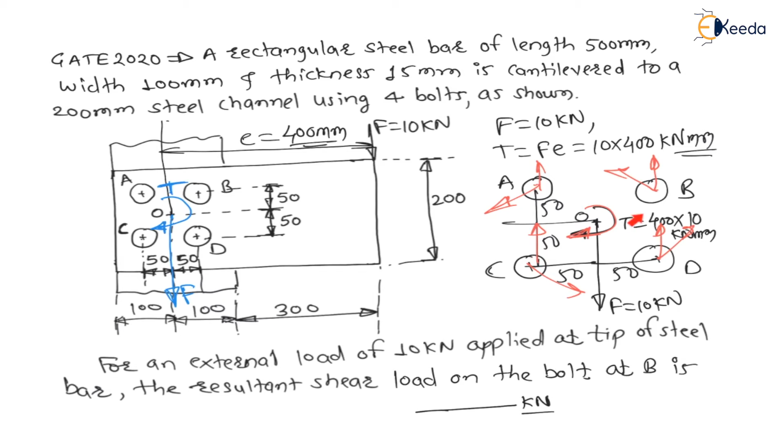Now everything I am erasing. We will consider these bolt dimensions and all the bolts that we are going to consider. Now consider the bolts. Here there is bolt A, bolt B, bolt C, and bolt D. Let us say these are the 4 bolts.

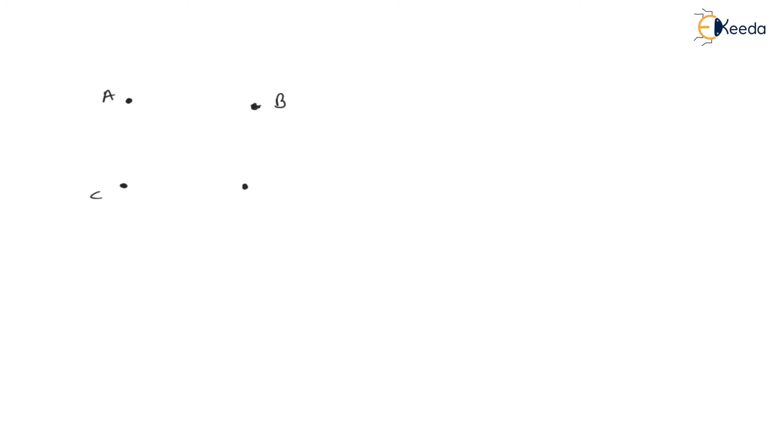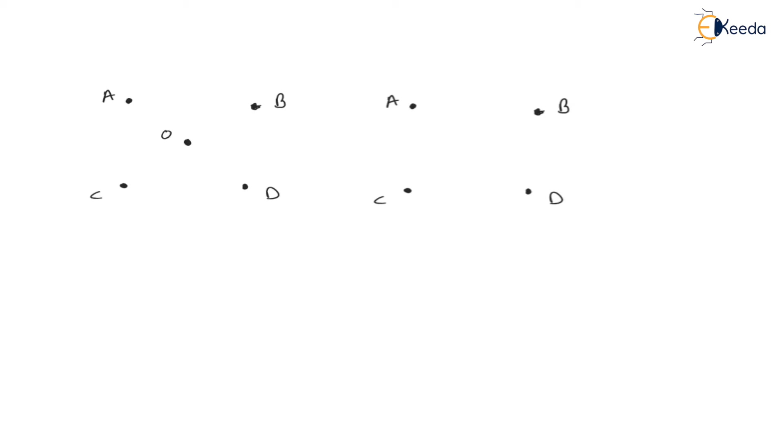Now on these 4 bolts, consider direct shear load separately and torque separately and add them together. Let us say this is the centroid of all the 4 bolts. Here O is the centroid of all the 4 bolts, and on this O, direct load of magnitude 10 kilonewton is acting.

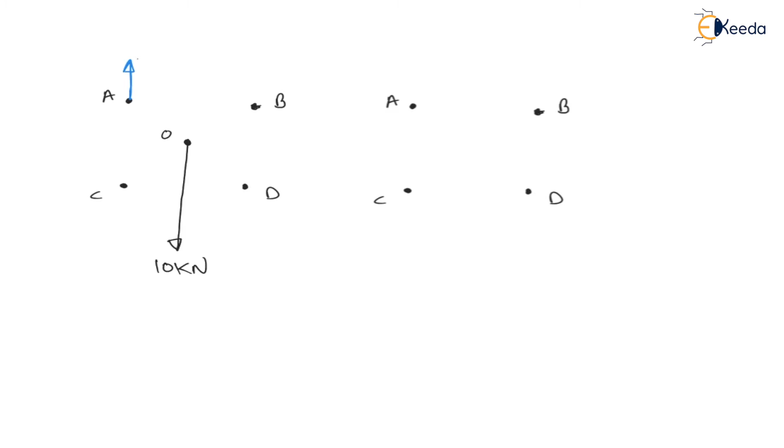Therefore, to resist this direct load, there will be a resistance in bolt A, primary shear load in A, that is PSA. There will be a primary shear load in bolt B, PSB. There will be a primary shear load in bolt D, PSD, and there will be primary shear load in bolt C, that is PSC.

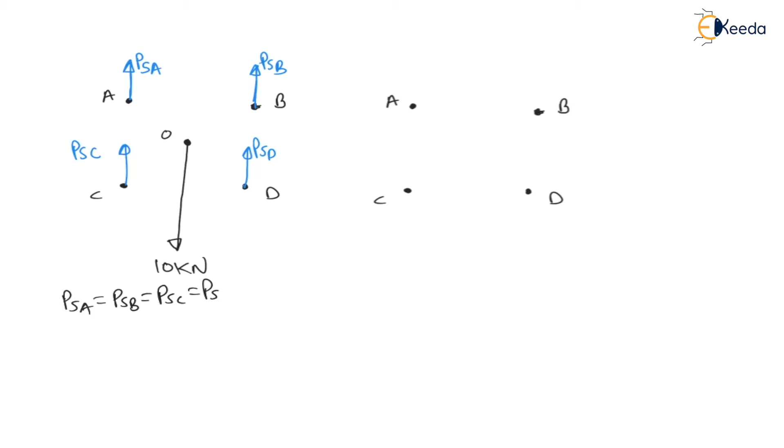To resist this 10 kilonewton direct shear load, there will be primary shear forces in all four bolts. Interestingly, the primary shear load is equally distributed among all the bolts. Therefore, PSA equals PSB equals PSC equals PSD, which is called primary shear load, which is nothing but total load divided by number of bolts, that is 4 bolts used here. Therefore, it is 10 divided by 4, so PSA equals PSB equals PSC equals PSD equals 2.5 kilonewton.

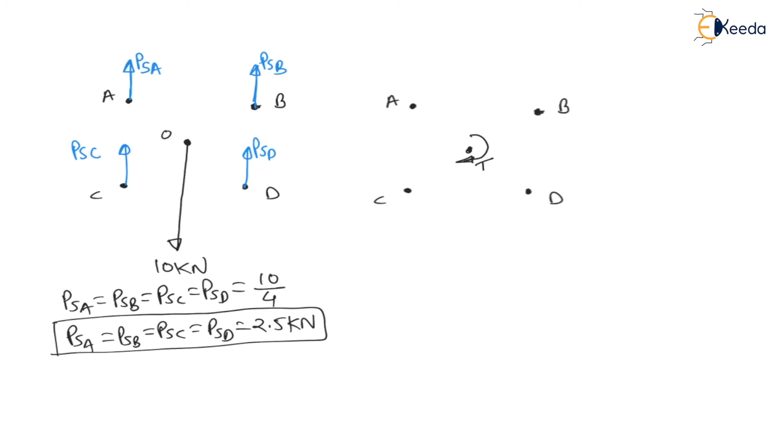It is in kilonewtons, my dear students. Now, if I consider torque separately, at this centroid, the torque is also acting. This torque T is of magnitude equal to force into eccentricity, which is nothing but 10 into 400 kilonewton mm, as we have seen.

Now, to resist this clockwise torque, there will be an anti-clockwise torque on all four bolts. So to create anti-clockwise torque, the forces will be like this. See, dimensions are given: this distance is 50 and this is 50, right? And heights are also given. These distances are given here, these distances are 50 and 50. In the diagram, this is already given.

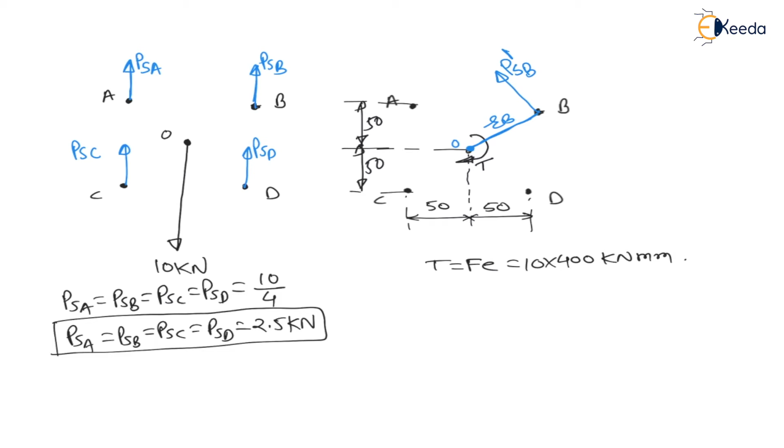Now, to resist this clockwise torque, there will be an anti-clockwise torque. For anti-clockwise torque, torque is nothing but force into perpendicular distance. Therefore, if I want to consider the secondary shear load on bolt B, then from O, the location of the torque, we take this radius. This will be radius of B, RB, and perpendicular to this radius there will be a secondary shear load which must create anti-clockwise torque. The secondary shear load on bolt B, PSB dash, will go like this, perpendicular to the radius. The angle between radius and force is 90 degrees.

Again, for bolt A, from O, the distance is called radius of A, and on A the force will go like this, the secondary shear load on A, PSA dash, which is creating anti-clockwise moment or torque. For bolt C, from O to C, this distance is radius of C, and the secondary shear load will be perpendicular to this radius, PSC dash. Similarly, for bolt D, there is radius of D, RD, from O to D, and perpendicular to this radius, in the anti-clockwise direction, there is PSD dash, secondary shear load on bolt D. Now, all the secondary shear loads are creating anti-clockwise torque to cancel the applied clockwise torque.

Now we have to find the radiuses first, then we will find all the secondary shear loads. From O, this distance is 50 and the vertical distance is also 50. Here 50 and this distance is 50. Now consider a triangle: this distance is 50, this distance is 50, and this distance is RB. Therefore this angle will be 45 degrees, this angle will be 45 degrees, and RB will be under root of 50 square plus 50 square, which is nothing but RB equal to 50 root 2 mm.

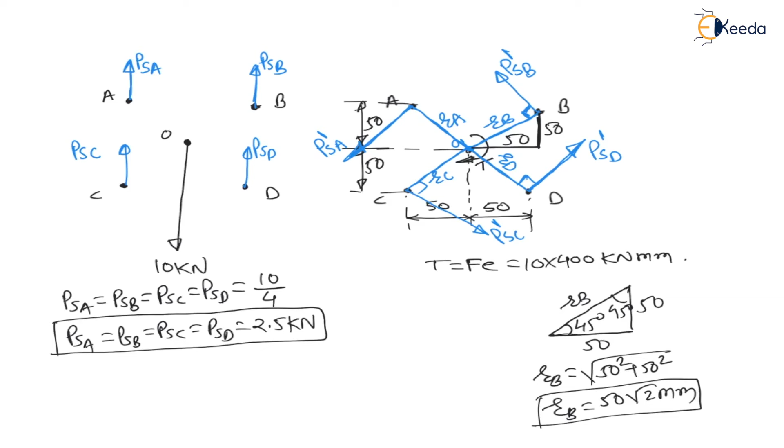RB will be equal to 50 root 2 mm. Similarly, due to symmetry, all the radiuses will be the same. That is, RA equals RB equals RC equals RD equals R equals 50 root 2 mm, because of symmetry you can solve in the same way for all bolts.

Now once you calculate the radiuses, let us solve for the secondary shear loads. The torque is 10 into 400 kilonewton mm. The secondary shear load is directly proportional to the radius, that is PSA dash is directly proportional to RA, radius of A, and this proportionality is removed with the help of a constant. Therefore PSA dash equals constant into radius of A, and this constant we have already proven with this formula, here I am directly using the result. This constant K is equal to torque divided by RA square plus RB square plus RC square plus RD square. This is the formula to find the constant, so let us find it.

Therefore K equals torque, which is 10 into 400 kilonewton mm, divided by all the dimensions in mm. Therefore we can say 4 into R square, that is 4 into 50 root 2 whole square. Therefore we get the constant value K equal to 0.2 kilonewton per mm, because torque we are using in kilonewton mm, and force we are using in kilonewton.

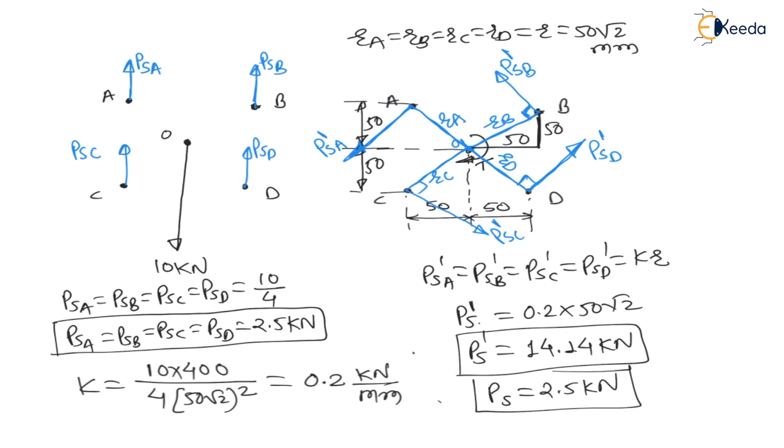Let us say here bolt A, bolt B, bolt C, and bolt D. Afterwards, we will give the names. Now here it is O point, centroid of all the bolts. On all the bolts, there is a primary shear, that is PS, of same magnitude, that's why I am writing PS only. There is a primary shear PS, and there is a secondary shear also, which is perpendicular to radiuses.

Here the radius will be like this. This is R. Here this distance is also R, and this distance is R, and this distance is R. These are the radiuses, and there will be secondary shear loads which are perpendicular to the radiuses, in the direction opposite to the rotation, opposite to torque, like this.

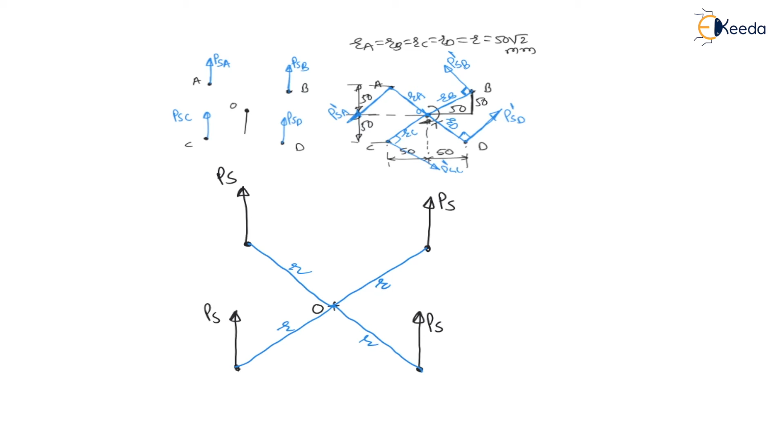This is PS dash, perpendicular to radius, PS dash perpendicular to radius, PS dash perpendicular to radius, PS dash. And bolts are, here there is bolt B, here bolt A, here bolt C, and here bolt D. These are the bolts.

Now let us combine them. The resultant of PS and PS dash will lie in between them. Now to join them, we need angles. Now let us find angles.

Let us find angles. See here, this distance is 50, this distance is 50, 50, 50. Because these two sides are same of 50, 50, this angle will be 45. Now extend this line. If I extend this line like this, therefore with horizontal this angle is 45, therefore with

vertical also this angle will be 45. But my dear students, our target is to find angle between PS and PS dash. This is your theta b, angle at b. Now can I say this radius and PS dash is perpendicular, therefore this theta b will be also 45 degree.

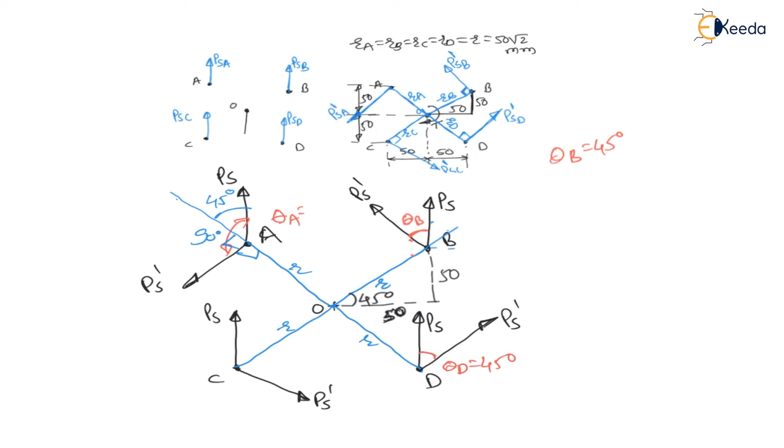Just we have calculated in this case vertical with inclined is 45 degree, and here these are perpendicular to each other. Perpendicular means this is 90 degree angle, means 90 plus 45 is 135 degree, therefore theta is 135 degree. Similarly, this theta c will be equal to 135 degree. Therefore resultant of these two, the resultant of all of them will lie in between.

That is resultant of b is like this, rb or fb, we can say pb, it is resultant load on bolt b. Similarly resultant load on bolt a, pa. Similarly resultant load on bolt c, pc. Similarly resultant load on bolt d, pd. Now the resultant will lie in between.

Now let us find them. Let us find the resultant. Now to find resultant, we have the law of parallelogram, and as per law of parallelogram, the resultant is given by, let us say we have two forces like this.

We have two forces, F1 and F2, and the angle between them is theta. I want to find the resultant of these two forces. As per the law of parallelogram, resultant R is equal to under root of F1 square plus F2 square plus twice F1 F2 cos theta, the total being under the root.

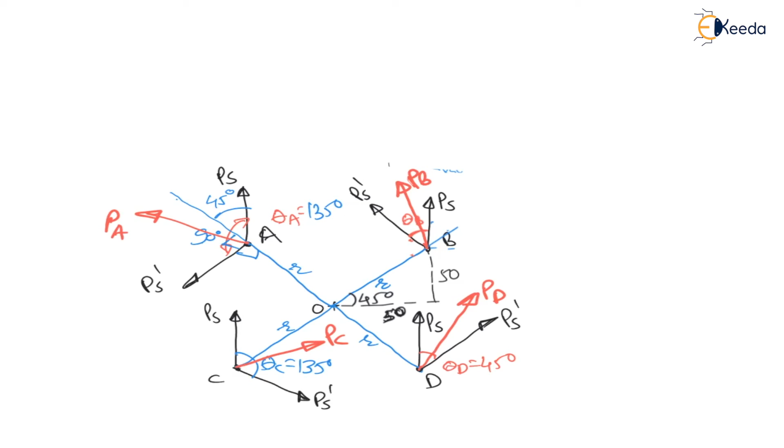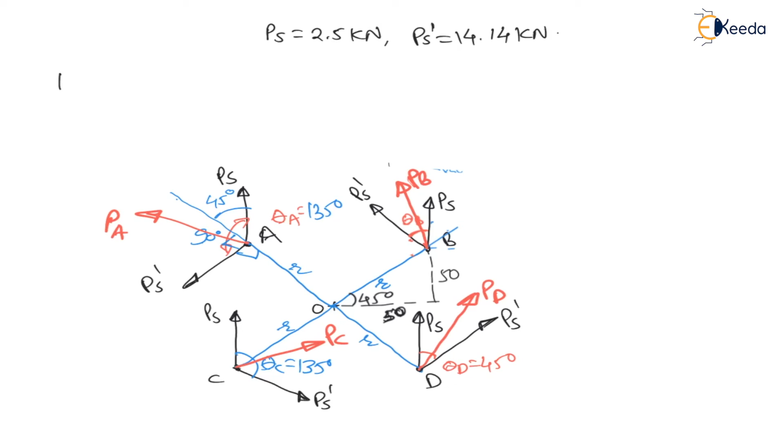With the help of the same formula, let us find the resultant of these stresses. My dear students, in the question they have asked to find the resultant load on bolt B only. We have primary shear load PS equal to 2.5 kilonewton, and secondary shear load PS dash equal to 14.14 kilonewton. Therefore resultant load on bolt B equals under root of PS square plus PS dash square plus twice PS PS dash cos theta b.

Here there will be a theta b, the angle at b. Angle between PS and PS dash at b is 45 degrees. Now put these values: resultant equals under root of PS squared (2.5 squared) plus PS dash squared (14.14 squared) plus twice into 2.5 into 14.14 into cos 45.

If I solve this, resultant load on bolt B will be equal to 16.005 kilonewton. This is your answer. That is PB equal to 16.005 kilonewton.

If they ask what is the resultant load on bolt D, then because the angle at B and angle at D is the same, resultant load on B equals resultant load on D equals 16.005 kilonewton.

If they ask what is resultant load on bolt A or bolt C, can I say resultant load on bolt A is equal to resultant load on bolt C? Because primary shear and secondary shear loads are the same, and also the angle between them is the same, which is nothing but 135 degrees.

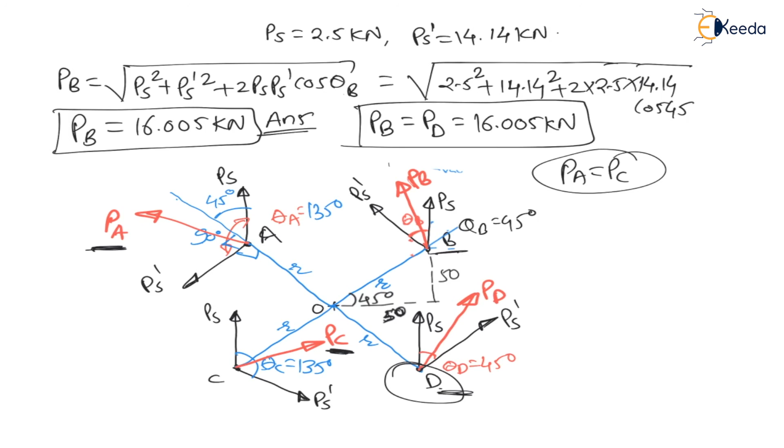Now let us solve for this. The angle is 135 for bolt A and bolt C. If the question is to find resultant load on bolt A or bolt C, the answer will be under root of PS square plus PS dash square plus twice PS PS dash cos theta A, or cos theta C.

Therefore PA equals PC equals under root of 2.5 square plus 14.14 square plus twice into 2.5 into 14.14 into cos 135. Solving for this, PA and PC will be 12.5 kilonewton. Therefore can I say the maximum load in the loading is load on B equal to load on D equal to 16 kilonewton.

Therefore B and D are critically loaded. We have to design bolt B and bolt D. Now here I am extending the question.

I am extending the question: if yield strength is 480 MPa and factor of safety is equal to 2, then find the diameter of bolt. This is the question.

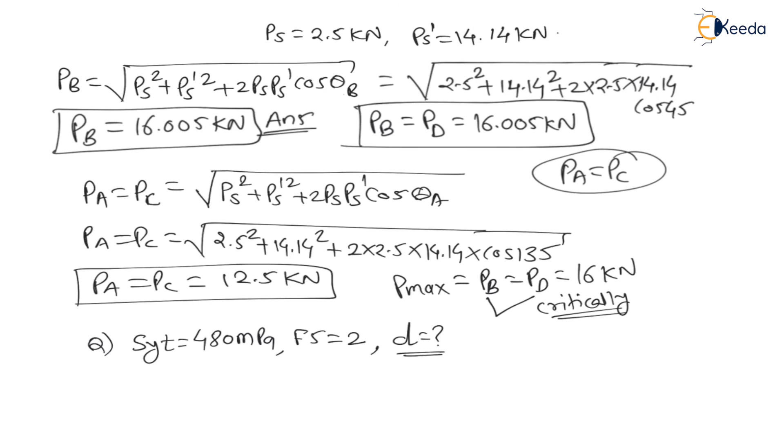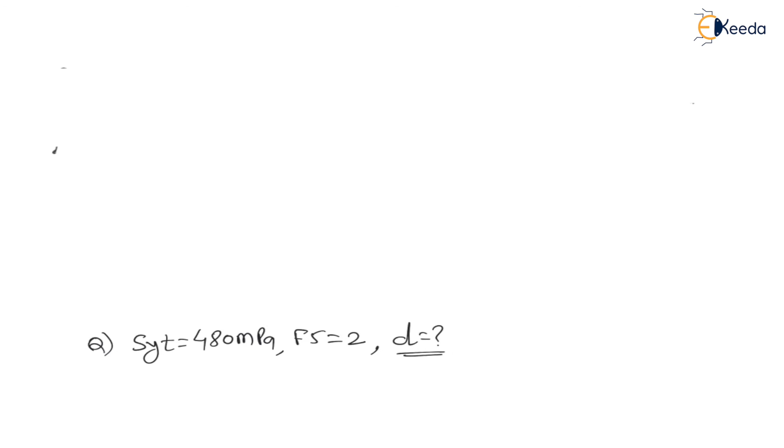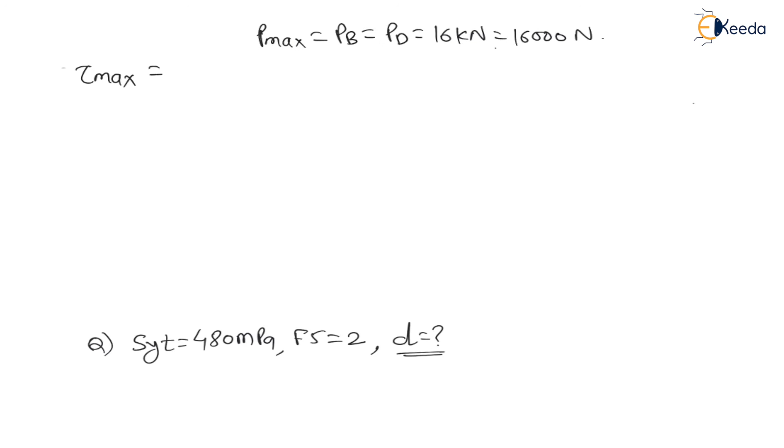Now while designing, always we have to design for maximum loading, and maximum load is on bolt B as well as bolt D. Therefore maximum load P max is load on B equal to load on D, which is 16 kilonewton, that is 16,000 Newton, and this is a shear load, total shear load. Therefore the maximum shear stress will be equal to maximum load P divided by area, and the area will be pi by 4 d square.

Now we have to equate this maximum shear stress with SSY divided by factor of safety as per theories of failure. And SSY is nothing but half of SYT. Therefore it is SYT divided by 2 times factor of safety.

Now put the values: load is 16,000 divided by area pi by 4 d square is equal to SYT 480 divided by 2, factor of safety 2. Now in this total equation only D is unknown, my dear students. From this equation solve for D.

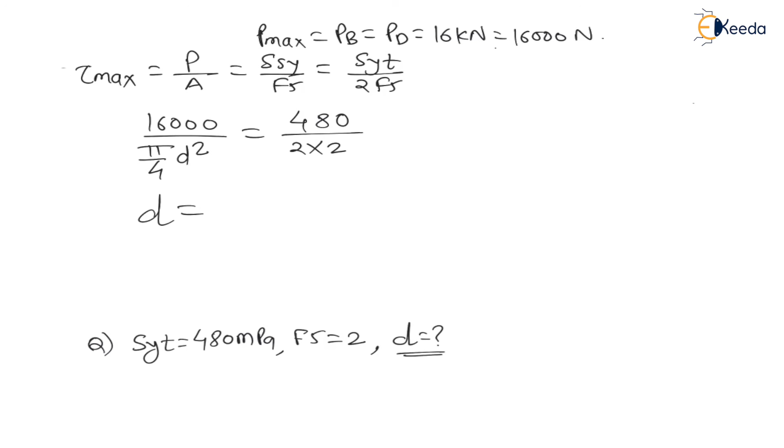Then you will get the equation for D square: the 4 will go up, 16,000 divided by pi, and again the 2 into 2 (that is 4) will go up and this 480 will go down, equal to D square. From this calculate D, then you will get diameter equal to

13.029 mm. Therefore we have to select a metric thread, MD equals M14 — we have to go for the higher side. If it is a GATE exam, exactly put this answer; if it is a selection process, we have to go for the higher side, meaning diameter we select as 14 mm for 13.029 mm. Thank you dear students.